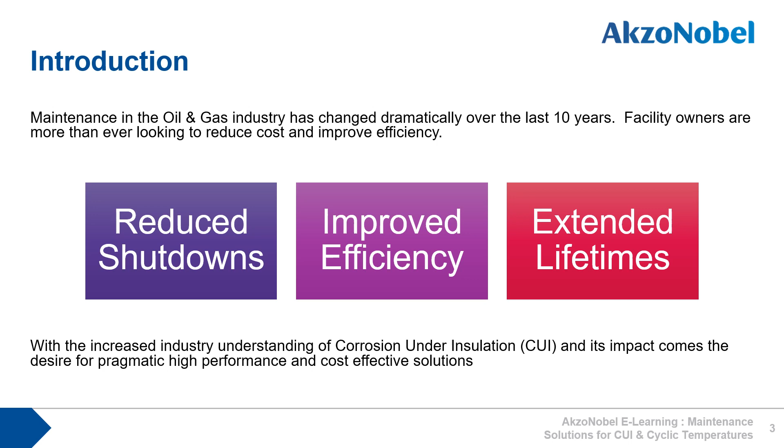As one oil and gas company put it, CUI is a latent problem that will always present a risk wherever there is a need to thermally insulate plant and equipment. However, the degree to which it is prevalent lies to a great extent in how much respect it is afforded during design and throughout operational life. It is a problem that is not in a hurry to show itself, but late notice of its arrival is inevitably costly to correct.

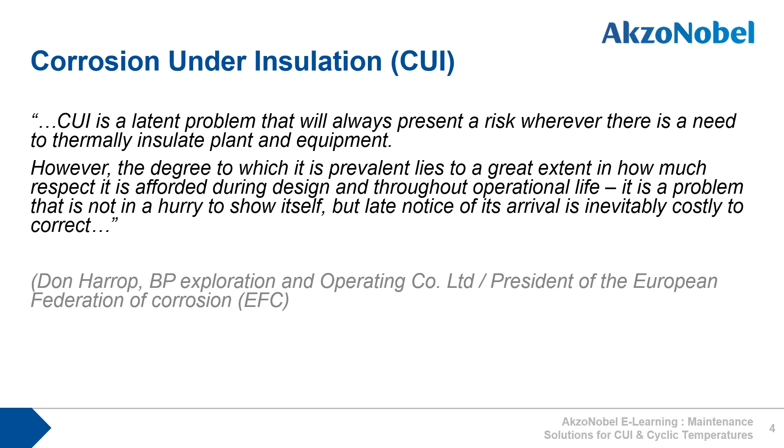And the issue is CUI really is the silent killer. You just can't see it as shown in this example. All seems fine, but actually corrosion spots are developing, which if left unchecked, will lead to a serious problem.

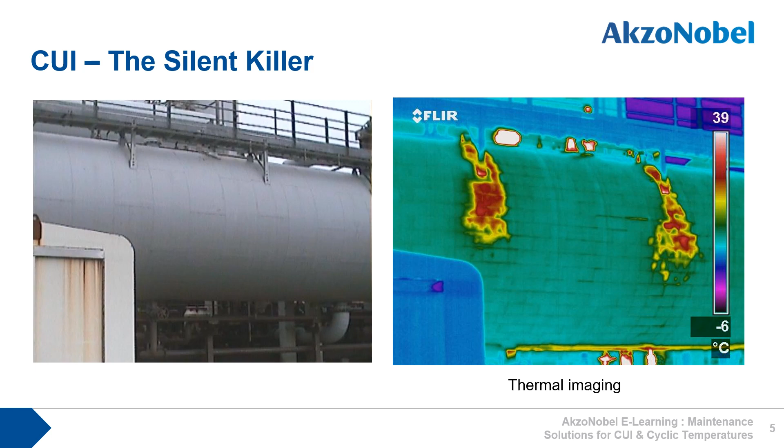So what actually is CUI? Corrosion under insulation occurs due to water ingress through an insulation system, creating a highly corrosive environment against the underlying steelwork. And CUI's corrosion rate can be up to 20 times faster than atmospheric corrosion, resulting in steel loss of between 0.5 millimeter and 3 millimeters per year.

As shown before, corrosion of the substrate is difficult to identify without the removal of the insulation and can therefore go unrecognized for significant periods of time. As a consequence, there is considerable degradation of steel piping and vessels with the potential for catastrophic failure.

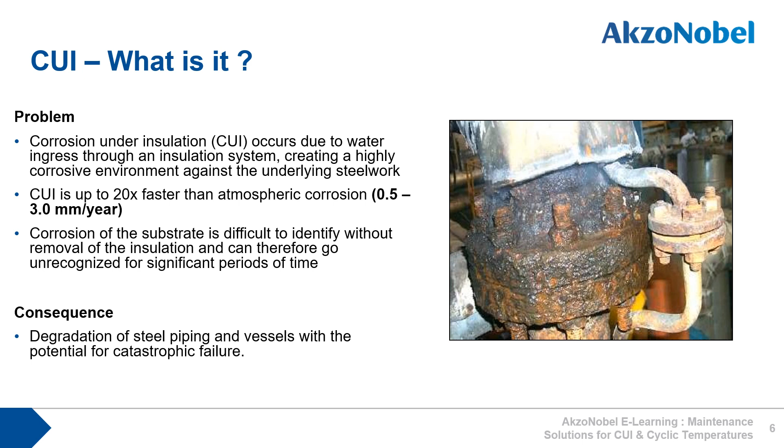CUI largely results from damaged cladding as seen here. In this case, contractors have walked across insulated pipes, probably as a shortcut or because there was no other way to access an area of the plant, and as a result, the cladding has split.

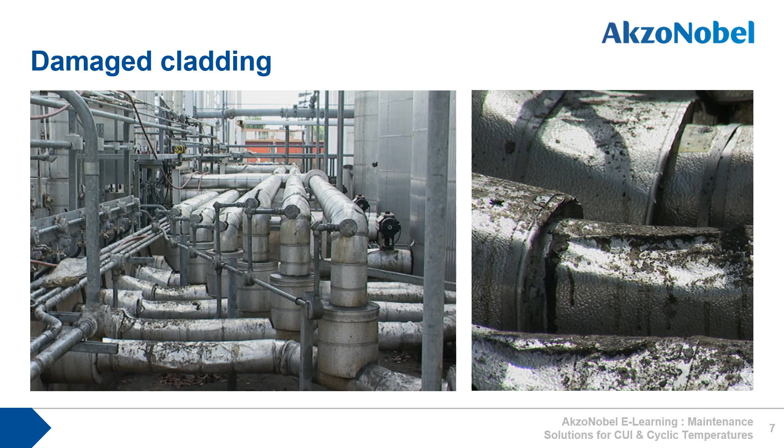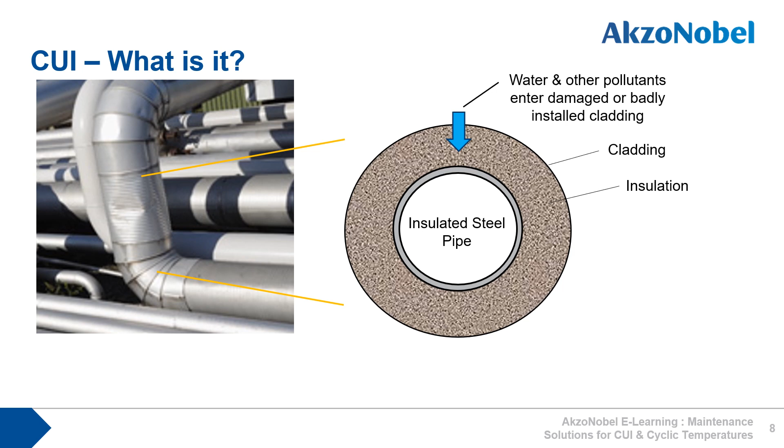As you can see in this schematic of an insulated pipe, water easily enters damaged cladding. Over time, the water starts to accumulate towards the bottom of the pipe. The hot pipe heats the water and dissolved salts start to accumulate on the pipe surface. The aggressive environment accelerates the corrosion process, which if left unchecked will lead to catastrophic failure.

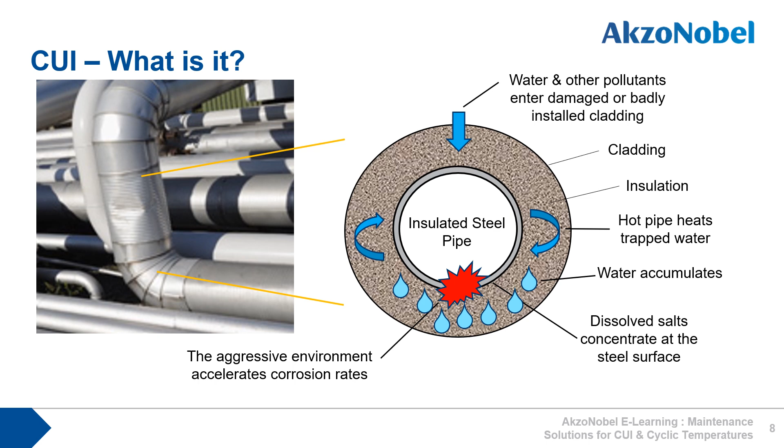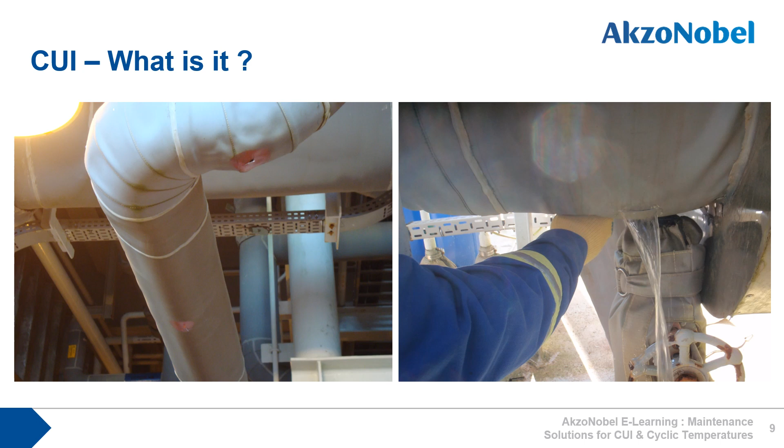CUI typically occurs between just above 0 degrees Celsius and 170 degrees Celsius, and is at its most severe at around 60 Celsius. It is fair to say that very little equipment experiences a constant temperature. It may undergo cyclic temperature processes and will be at ambient during a pre-startup and shipping to site, during annual shutdowns and maintenance, and during unplanned shutdowns and outages. So it is fair to say that all piping and equipment under insulation will enter the CUI temperature range at some point in its life.

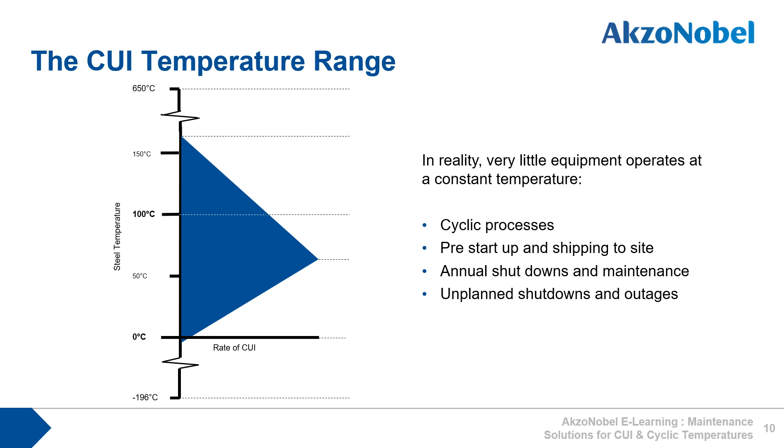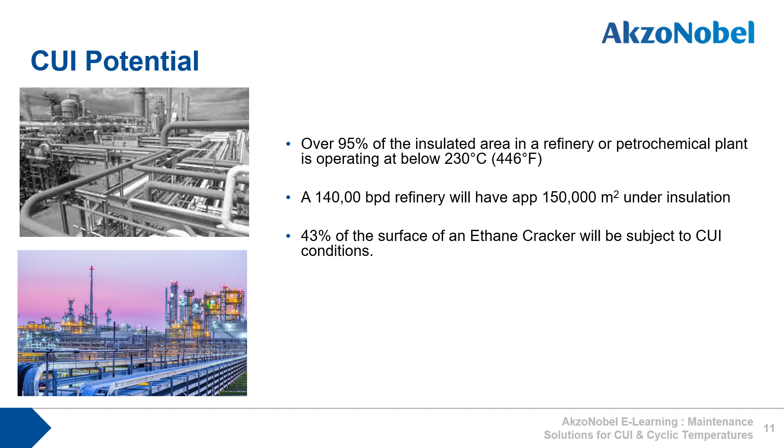On a downstream oil and gas facility, the potential for CUI is vast. It is said that over 95% of the insulated area in a refinery or petrochemical plant is operating at below 230 Celsius, and a 140,000 barrels per day refinery will have approximately 150,000 square meters under insulation. Just an ethane cracker has 43% of its surface subject to CUI conditions.

With so much piping and equipment subject to CUI, it is no surprise that CUI maintenance work can take up more than 50% of a typical oil and gas facility's maintenance budget. Indeed, it can cost over €1,000 per square meter to scaffold, open up the insulation, prepare the surface, apply a protective coating, then make good the insulation. And then there are also the additional disruption and safety issues. With such a heavy impact on resources, when CUI maintenance has to be carried out, it needs to be done right first time.

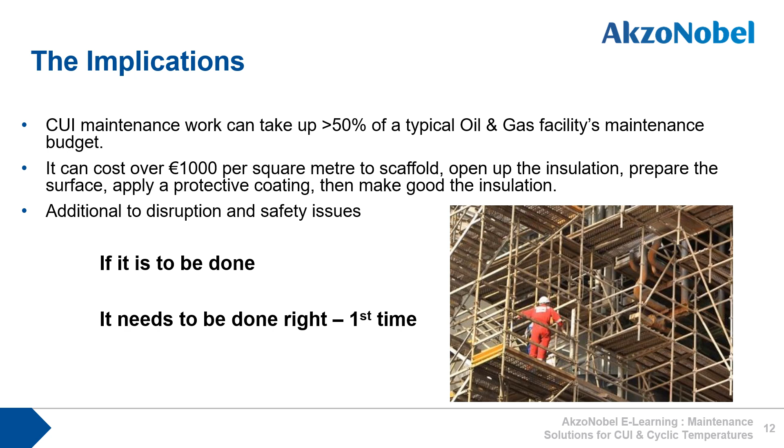Maintenance on operating plant presents its own challenges. Blasting can be impractical or restricted in operating facilities, so hand tool surface preparation is widely used. High temperature coatings are particularly sensitive to low surface preparation. Site experience shows that coatings in CUI conditions applied onto hand-prepared surfaces can fail in less than 2 years.

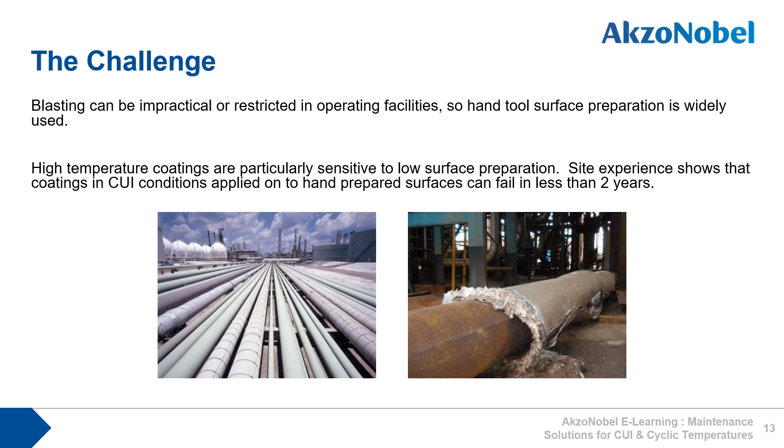With operational losses due to shutdown equipment costing more than $100,000 per hour, the ability to carry out planned or even emergency maintenance whilst the facility is operating can be very attractive. However, the need to coat operating piping and equipment causes technical and practical challenges for traditional coating technologies. Although most traditional solutions can be applied at elevated temperature, very few are actually formulated to be applied at such temperatures, and so this potentially reduces long-term performance and leads to extra uncertainty and cost.

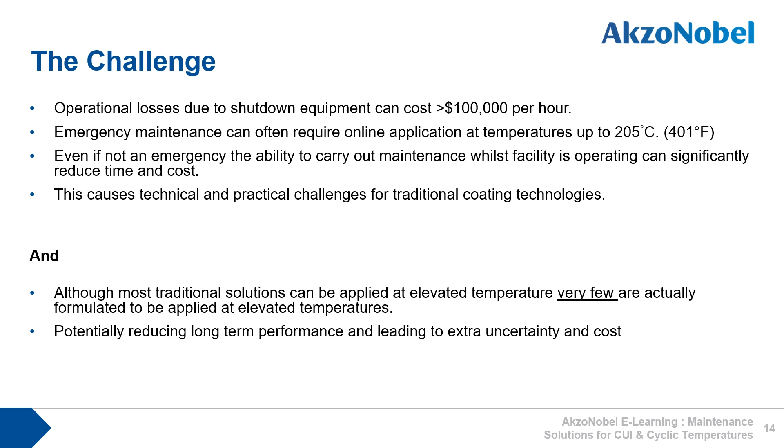When it comes to hot application, many of the existing solutions do not meet functional requirements. Some coatings have poor workability, resulting in reduced application quality. In many cases, the coating needs to be brush or roller applied, and this presents difficulties for coatings formulated for ambient temperature application.

Some coatings show early failure due to poor surface preparation. Most existing high temperature coatings, particularly for CUI service, usually require higher levels of surface preparation. As they are not designed for hot application, they dry too quickly to enable them to adequately wet the surface, reducing adhesion and performance.

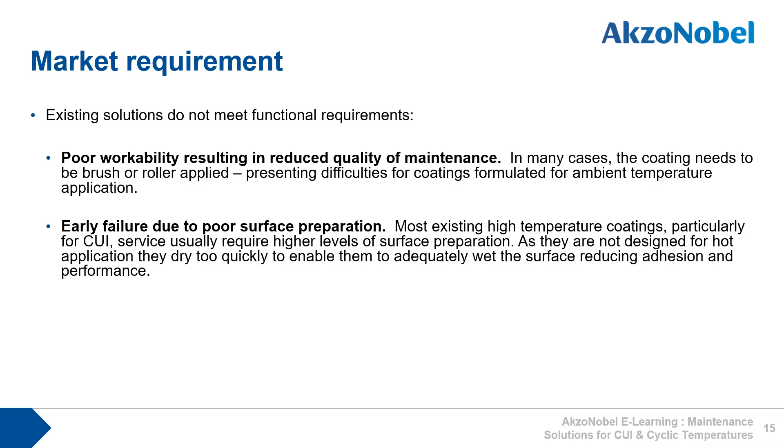In the next few slides, I shall present AkzoNobel's product offer for CUI and cyclic temperature applications.

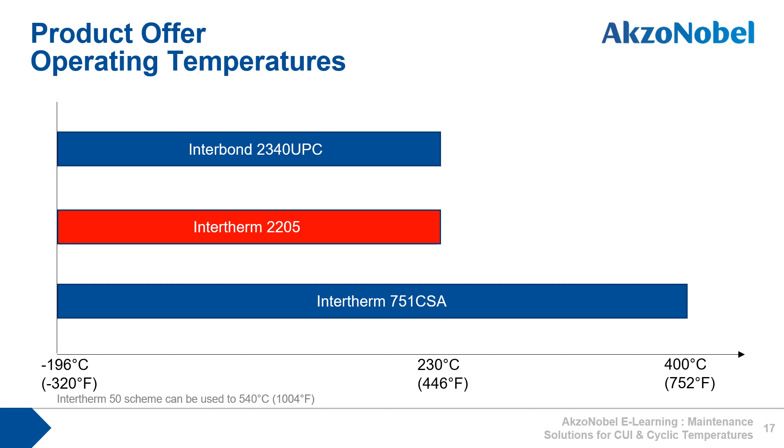But when it comes to direct-to-hand prepared hot steel applications, Intertherm 2205 is by far the best choice, with hot steel applications from 60 to 205 degrees Celsius. This product was developed in close cooperation with a national oil company specifically for hot steel applications. The rest of this presentation will now focus on Intertherm 2205 in detail. Interbond 2340 UPC and Intertherm 751 CSA will be covered in another presentation.

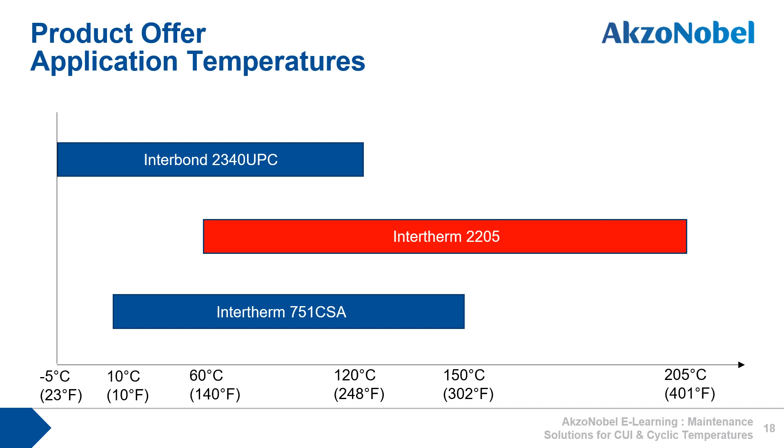Introducing Intertherm 2205, a novel hot spread epoxy technology. Intertherm 2205 is a maintenance coating specifically designed for application to hot, hand-prepared steel. It is a user-friendly maintenance coating specifically designed for combating CUI that helps generate time and cost savings through easy application and improved performance over hand-prepared hot steel.

It is a next-generation hot spread epoxy phenolic with hot application to 205 degrees Celsius, high temperature resistance to 230 degrees Celsius, can be brush or roller applied, has excellent tolerance to hand-prepared, i.e. ST2 substrates, is fast curing with recoating and re-insulating in 15 minutes at 100 degrees Celsius, is 85% volume solids. Its minimum surface application temperature is 60 degrees Celsius, and it can be used at cryogenic temperatures down to -196 degrees Celsius, but must be applied at 60 degrees C first. Its typical scheme is 2 times 100 microns.

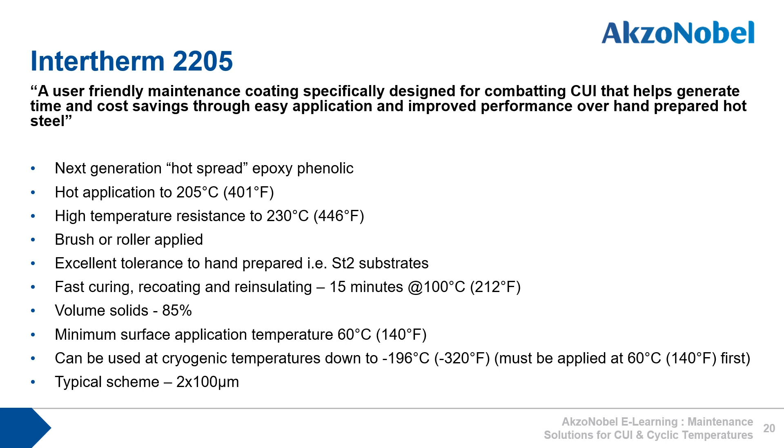Let's now look at some of Intertherm 2205's product features in more detail. Firstly, what is the benefit of hot spread technology?

Here, Intertherm 2205 is applied to a hot panel at 150 degrees C. The first thing to note is how well the coating adheres to the brush, enabling excellent transfer efficiency from can to substrate. Second, you can see how workable the coating is on the hot panel - this is its hot spread characteristic. There is very little solvent released. The coating clearly maintains a wet edge, allowing it to be applied across the whole face of the panel in a smooth fashion, with a low level of brush marks remaining in the film.

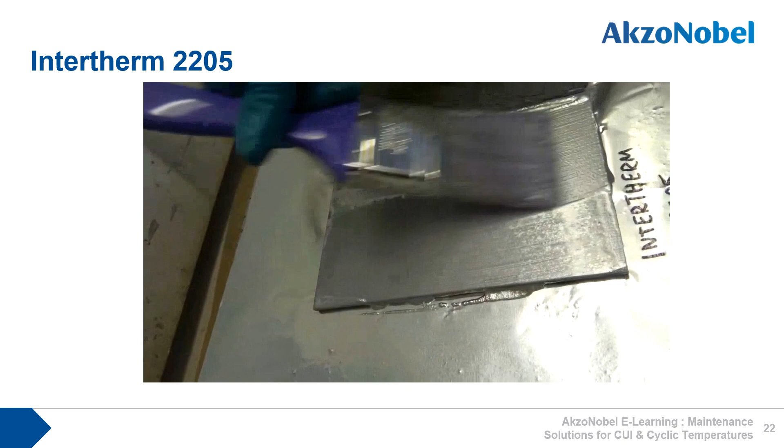Contrast this with an example product of the inert multipolymeric matrix type. Straight away, you can see the amount of solvent emitted, that there is no wet edge, making the product very hard to work with. And you can see that the product dries to leave a very rough surface.

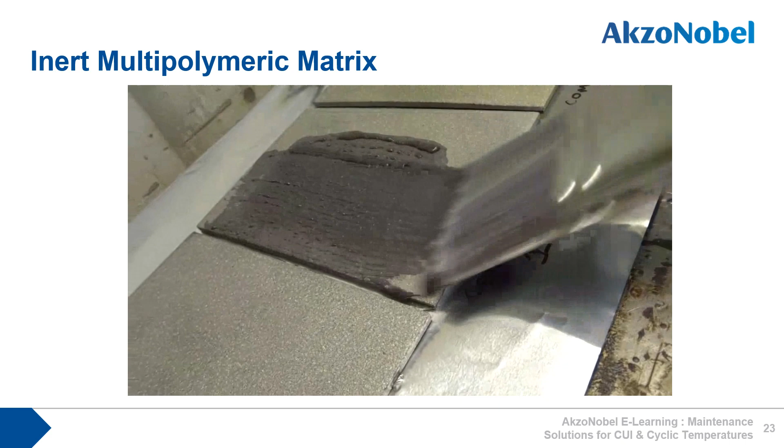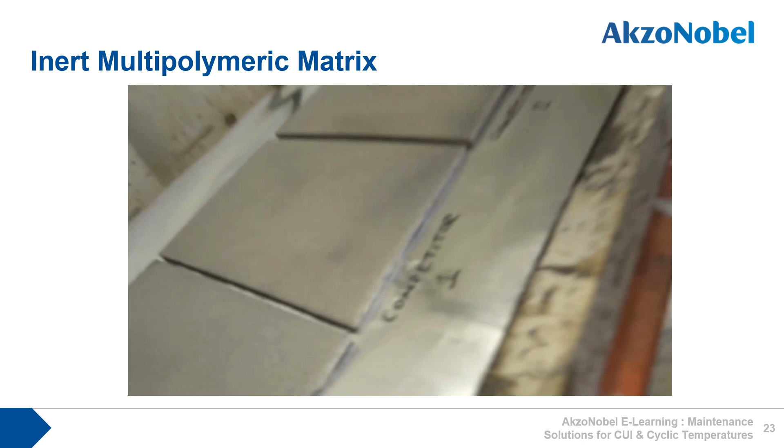And here is an example of epoxy phenolic being applied to hot steel. Again, you can see a lot of solvent being emitted.

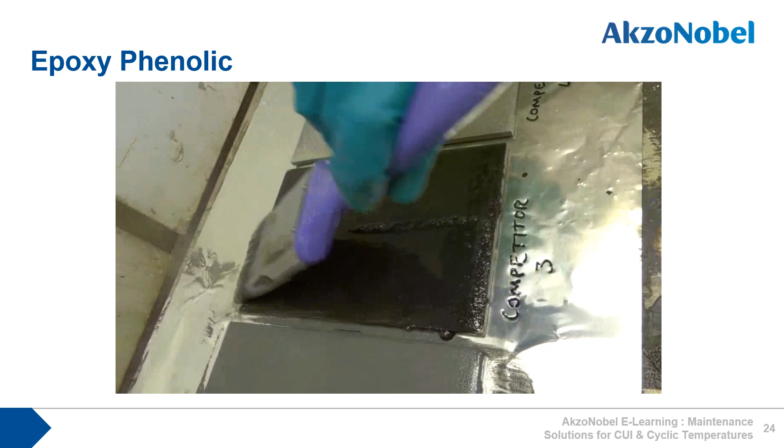The issue with highly solvented coatings being applied to hot steel is the risk of pinhole formation. Pinholes lead to early corrosion onset, and so clearly coatings that contain pinholes are a huge CUI risk. Conversely, a coating formulated for hot steel application with a low solvent content and a long wet edge does not produce pinholes and so delivers excellent performance in service.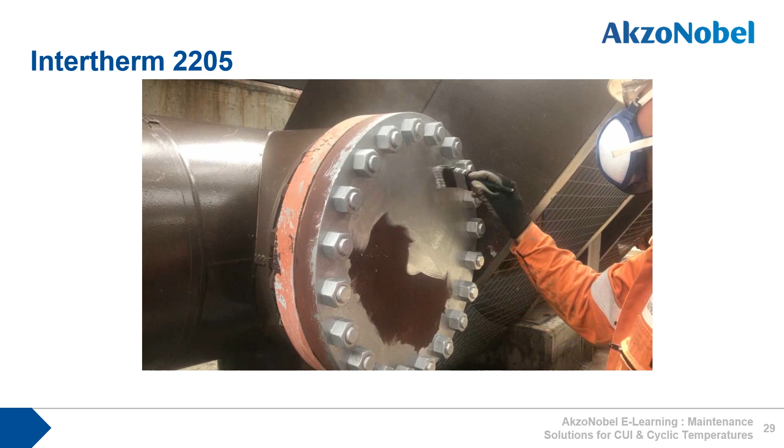To testing for surface tolerance. Intertherm 2205 is ideal for use on steel hand prepared to ST2 surface cleanliness.

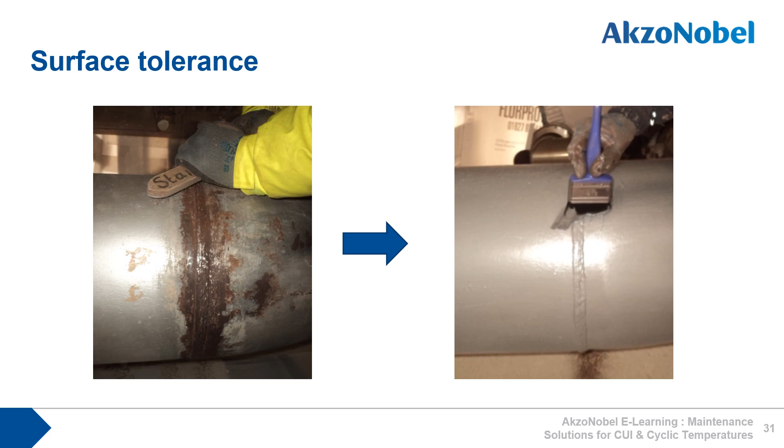Now a word about testing. The CUI Cyclic Corrosion Pipe Test, CCC-PT, now known as the Houston Pipe Test, was developed by AkzoNobel in the early 2000s when no test protocol existed to evaluate CUI under cyclic temperature environments. The test has been shown to be a very good method to screen the performance of coating technologies used to combat CUI. Intertherm 751 CSA successfully passed this test and has gone on to demonstrate more than 10 years successful in-service performance.

The test is based on clamping 2 calcium silicate half shells around a pipe coated with the product under test. Calcium silicate was selected as the insulation material because of its ability to absorb a large amount of water and so maintain a level of water saturation around the pipe. The pipe is then placed on a hot plate set at a temperature to provide the desired temperature gradient across the pipe.

Then, over a 24-hour period, the pipe undergoes the following cycle. Add 1 liter of water, 1% sodium chloride solution. Apply heat for 8 hours to produce a thermal gradient. Then add 1 more liter of salt water solution and allow to cool to ambient over 16 hours. Repeat the cycle 30 times and then remove from the test and inspect the coated pipe.

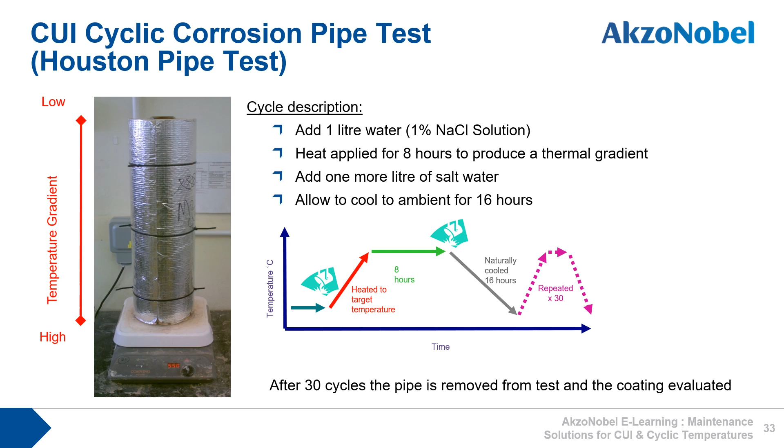Intertherm 2205 was tested using the Houston pipe test over 3 different time periods, all over ST2 prepared steel and all after application to a pipe heated to 100 degrees Celsius. The 3 time periods were 3 cycles, 30 days, and 6 months. In all cases, Intertherm 2205 showed no film defects after the test completed, as shown in the example photo on the right.

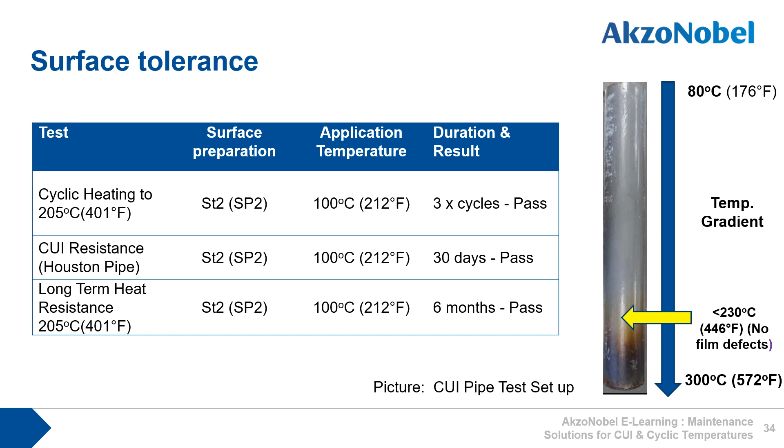Here we have a photo of Intertherm 2205 applied to ST2 prepared steel at 110 degrees Celsius and then exposed to hot salt spray for 2000 hours. The pull-off adhesion results are excellent, with the failure mechanism being cohesive splitting of the coating.

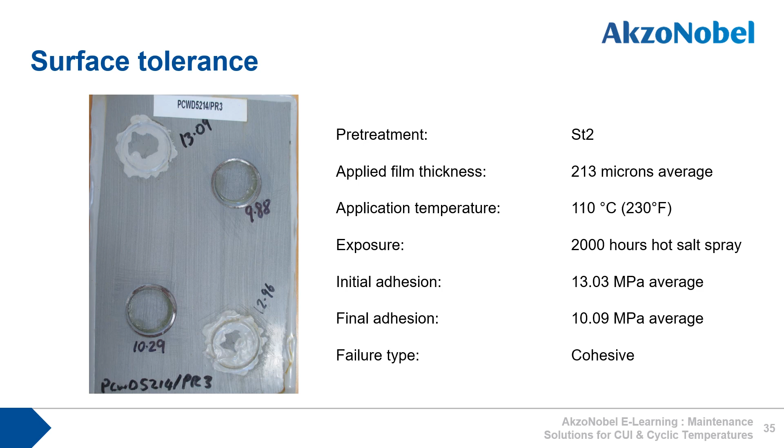This photo shows Intertherm 2205 applied to ST2 prepared steel at 110 degrees Celsius and then exposed to hot salt spray for 2000 hours, but this time after 3 cycles of the Houston pipe test heating to 205 degrees Celsius. Again, the pull-off adhesion results are excellent, with the failure mechanism being glue failure stroke cohesive splitting of the coating.

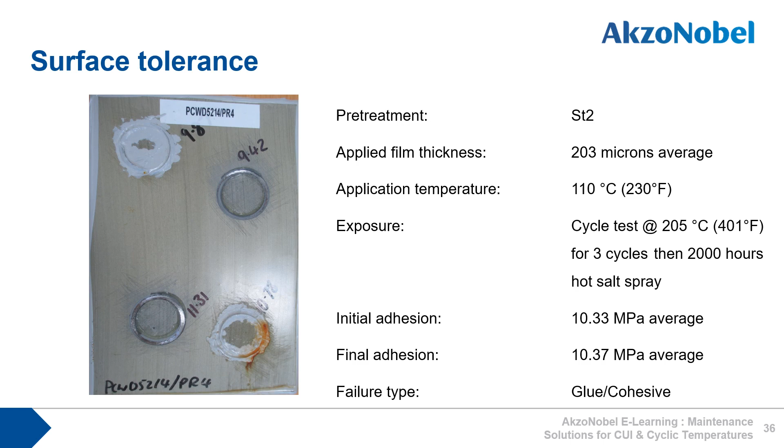Intertherm 2205 was also tested to the ISO 12944 Part 9 test standard. 2 surface preparations were carried out, SA2.5 and ST3. Intertherm 2205 was applied at 100 degrees C and 200 degrees C. Corrosion creep results were excellent, particularly when the coating had been heated to 200 degrees Celsius.

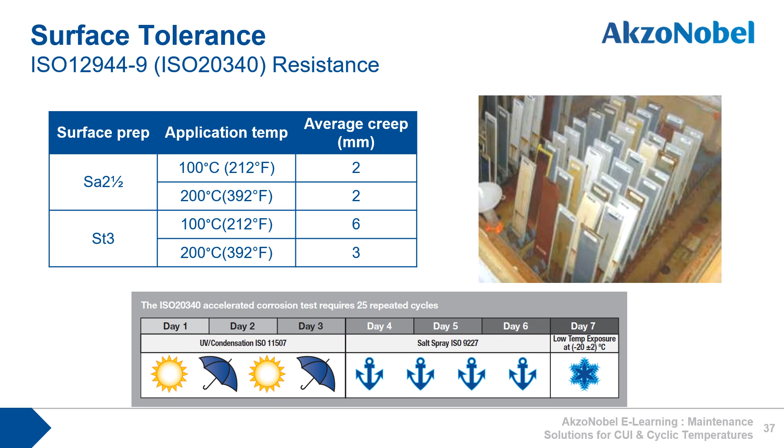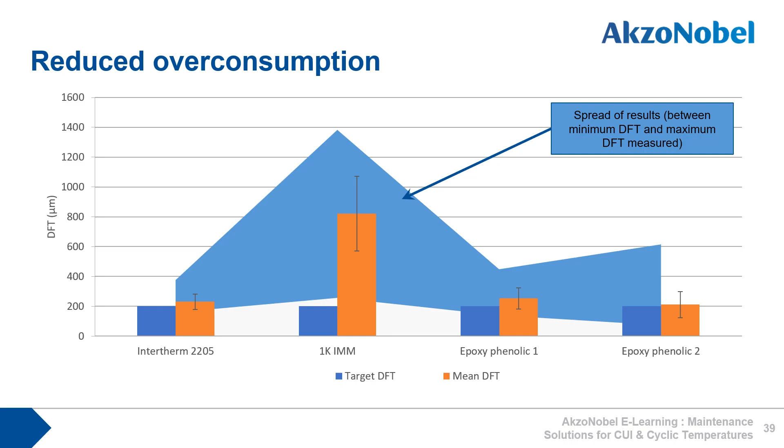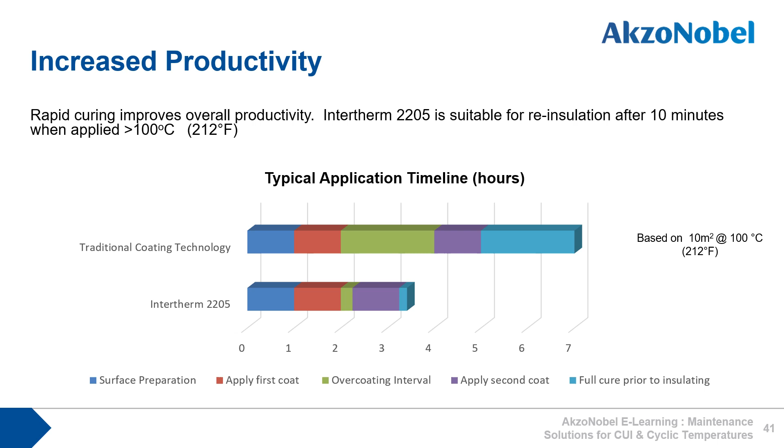So to summarize, traditional solutions are not designed for hot application. And by using traditional systems, both performance and cost issues can be created. Intertherm 2205 was specifically developed to provide ease of application with no special equipment or process changes, and to be applied on prepared hot steel surfaces. Intertherm 2205 reduces the need to take equipment offline. This speeds up application and re-insulation, and so saves time and money.